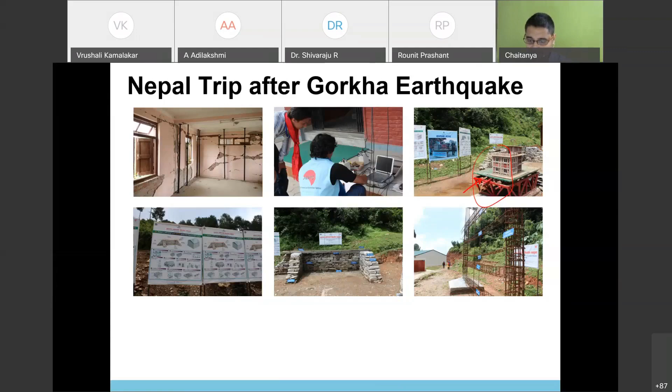From here, what we learned is that in spite of the fact that all these training centers were located in rural places, they were able to create a huge amount of impact. What I personally learned is that even if we learn hard, if we cannot keep it simple and educate, the implementation process is very largely affected.

With this understanding, my approach to doing research had slightly changed, because the purpose and objective should be to solve the problem, and for that we need to understand the problem thoroughly. In this case, the Nepal NGOs and the government understood that their problem is economy.

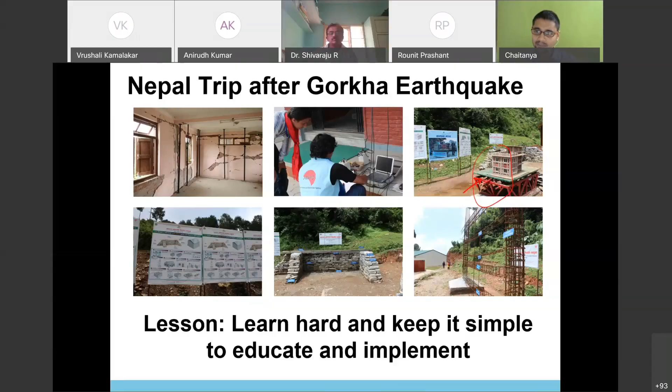They cannot afford a huge amount of money to create awareness in rural areas, so they made the equipment small, but the science and engineering behind it remained the same—they right-sized the understanding of science and engineering to fit their budget, and could use this program to create awareness even in small areas. This was something that I understood a lot, and it's the motivation behind the research work I'm going to talk about from now on.

To give you a brief preface of today's presentation, the field of interest here is structural dynamics and earthquake engineering, and we will also talk about some social aspects involved in retrofitting. Retrofitting is strengthening an existing building against earthquakes. This research work is theoretical, field survey, and also numerical.

This whole work was developed in the context of Nepal, which means Nepal acts as a laboratory for this research. However, it is also applicable for seismic zones of India, where this soft story problem prevails. I'll talk about the soft story problem in the next slides.

I basically assume that the audience can understand some basic structural engineering terms such as interstory drift, finite element method, static pushover analysis, base shear and roof displacement, dynamic analysis, and engineering optimization. You don't have to know details of these technical terms, but at least a broad understanding of what they are and their implications would be enough for understanding my presentation today.

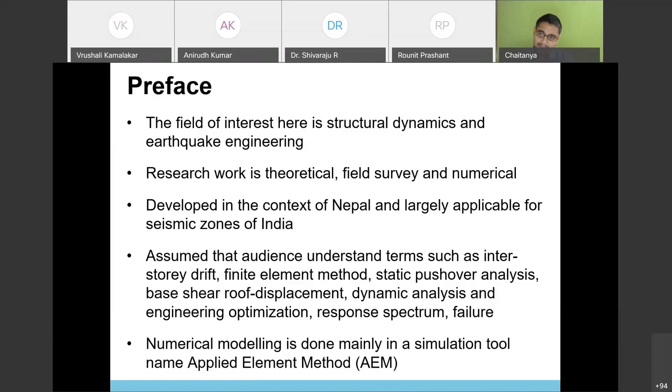As a structural engineer working in earthquake engineering, what we think as soon as we see these buildings is, of course, there are a lot of other problems with these buildings, a lot of other provisions which don't exist, but the soft story problem is a major issue. Many buildings had collapsed due to this soft story problem. It caused severe damage during the Gorkha earthquake, with many buildings going into pancake collapse because of it. This is a very prevalent and well-known problem, yet it has not been solved.

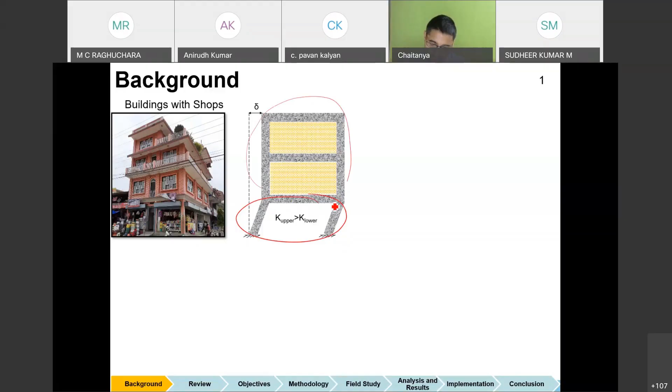What happens in this soft story is the stiffness of the bottom story becomes lower than the stiffness of the top story, causing what's called the P-delta effect. When the building slightly moves, the whole mass on the top floors exhibits moment at the bottom of the building, and this building goes into a mechanism and collapses.

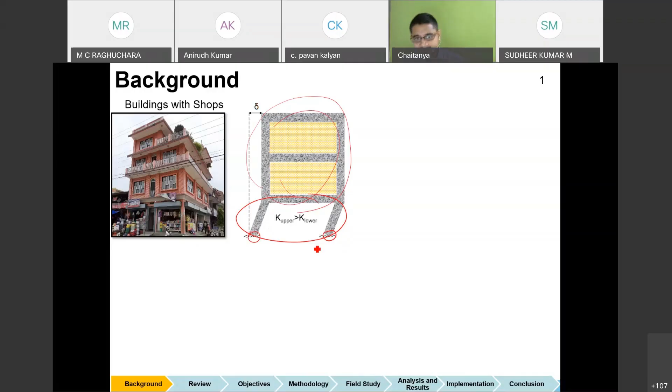That's what we have seen in the 2015 Gorkha earthquake, where many buildings collapsed in the pancake collapse mode. Preventing these buildings from collapsing this way is the primary concern of this research.

But if we look at it as a structural engineer, we see so many buildings with open stories in almost every semi-urban and urban area of Nepal. This is because of the economic condition and the amount of benefits people get from these areas - it's probably their livelihood. The reason why these buildings are constructed this way is because they earn livelihood from these spaces.

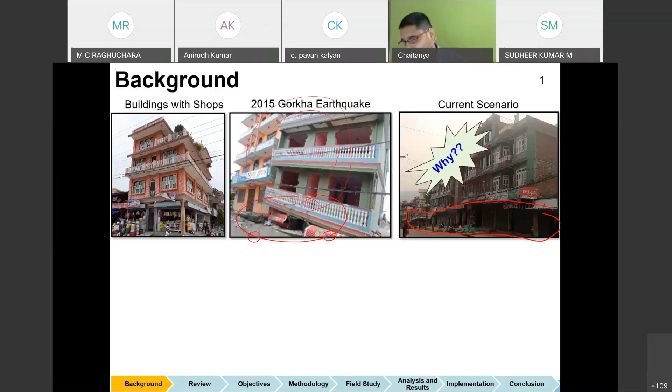So the question still remains why. The reason is the social need - it is their culture and lifestyle to have business and parking on their first floor or ground floor.

Because these buildings are usually constructed in urban and semi-urban areas, the social problem is that there is not enough economic support from the government to go for retrofitting, and the promotion system does not exist. So the social comprises social need, and the technical need is an appropriate methodology which can solve this problem, along with availability of material.

We cannot impose solutions like steel jackets, because while steel jacket is a very good solution which can also retain their open space - since it only jackets the columns - the space required for opening the shop still remains open.

So this is a good solution, but unfortunately, the number of shops or buildings which are open are huge, and we need a huge amount of steel, which is probably not available indigenously in Nepal. It has to be imported from India or China, and the cost of retrofitting will become very high. Considering this is a very large scale retrofitting project, this probably cannot be a good solution.

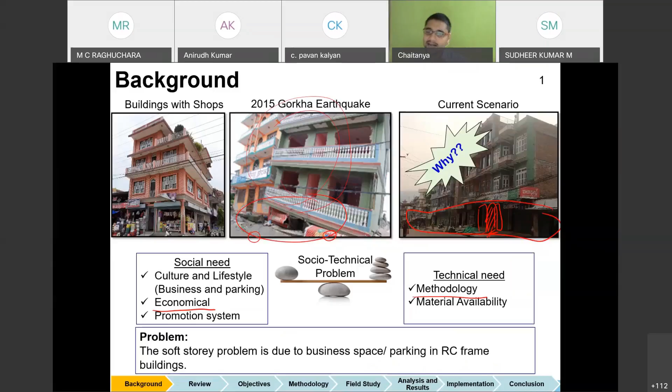So what we understood is that the soft story problem is due to business space or parking area in RC frame buildings. We are narrowing down the problem by saying it is because of business space and parking in RC buildings.

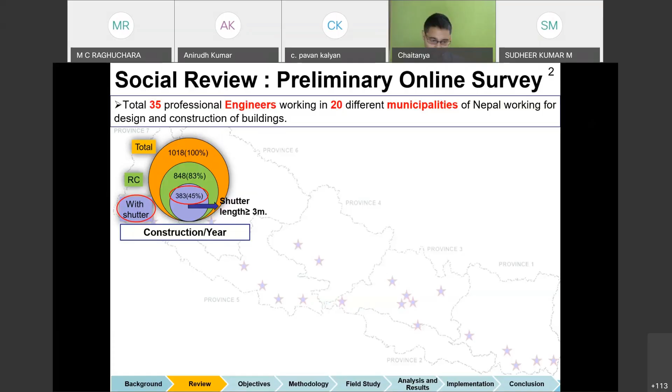From their responses, we understood that more than 45% of the buildings have shutters on their ground floor in a year, and the average number of stories of these buildings is less than 3 for most of them. So these are low-rise buildings.

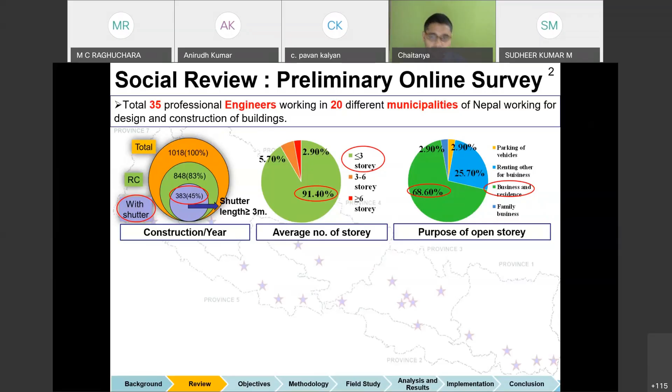The purpose of this open story is either for business or residence also, in certain cases where people have a small parking lot in the front and a very small room in the back. Why they are not going for retrofitting is because they do not want to close their business or parking lot. Of course, this is a natural understanding based on our observation, but we still wanted to validate it using responses of professional engineers.

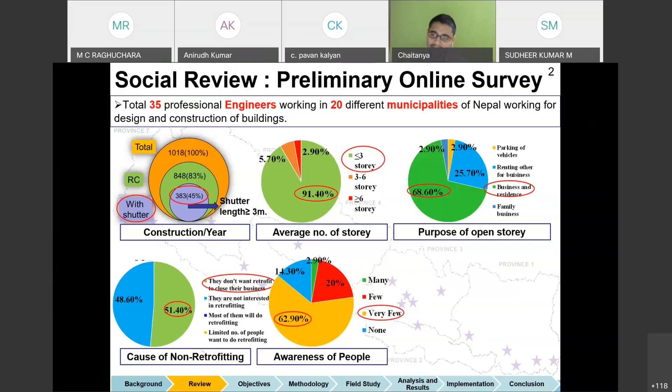So the hypothesis was kind of verified with this point. And the awareness is quite low in Nepal, in spite of the fact that the Gorkha earthquake had already occurred.

And what is the requirement of these people? So now we try to educate them. If we try to educate them on retrofitting of buildings, what would they ask for? Do they ask for life safety, or do they ask for a very, very strong building?

So the answer was they want life safety during a large earthquake. That is, even if the building goes into a collapse mechanism, you have enough time to evacuate the building completely. It wouldn't be a sudden collapse. So that amount of safety, if you can ensure with your retrofitting solution, would be a great solution for their social need, considering their economic status.

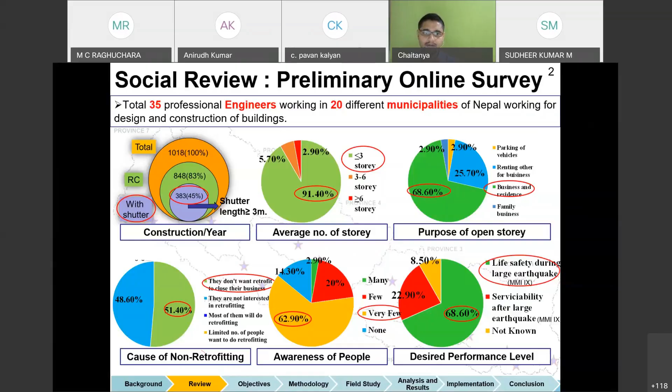So after that, we did a technical survey. And to do the technical survey, we used software called AEM.

So what we did is we took a very typical frame, shown in A, and we applied a force on the top story to replicate a pushover kind of behavior from the building. We pushed this frame and tried to get the force and displacement delta, and we divided the force by seismic mass, and we got something called the base shear coefficient, as shown in this figure.

So we did this exercise with all the frames shown in this figure. These are different kinds of frames or different kinds of solutions that have been implemented in the past.

So the best solution would be using an infill wall itself, which is in B. And then we use solutions such as strengthening all columns and beams, strengthening all columns and beams of the open floor, strengthening columns only, strengthening columns and increasing shear capacity of the beam, increasing capacity equal to the infill, increasing the column capacity to be equal to the infill, and then providing steel bracing, providing shear wall, and steel jacketing.

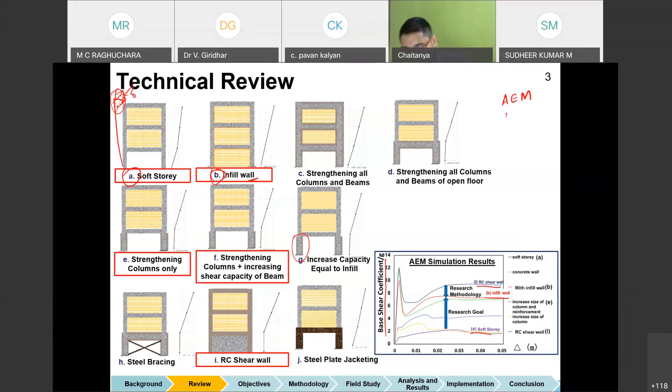So what we decided to do, I'll explain in the next slides, but to briefly tell you: if this is the capacity of your soft story, if you can increase the capacity of the soft story to this point by bringing down the capacity of the shear frame to this point, that would be a very optimum method of finding a retrofitting solution for the soft story problem.

But among these different cases of retrofitting solutions, we drew a few conclusions based on analytical methods as well as numerical modeling in applied element method. We found that these 5 cases were showing low performance.

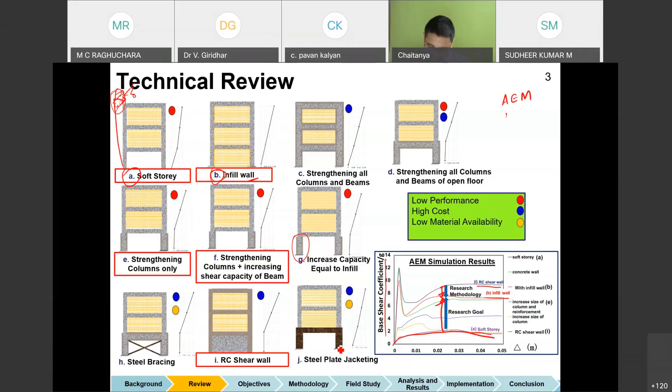Some of them are very high in cost. Some have very low material availability, such as steel jacketing, which as I explained earlier is not available in Nepal, and the cost is also very, very high. And some of them have very low usability.

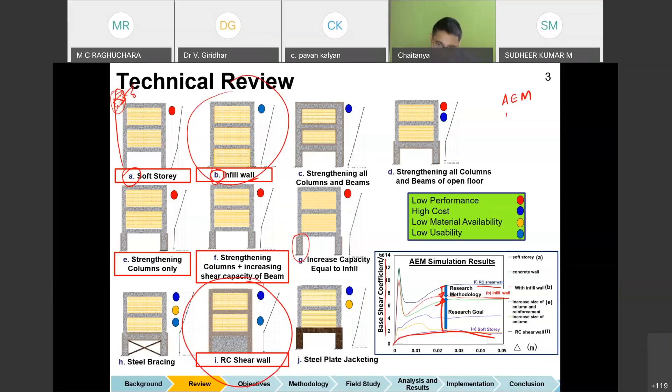For example, this is a very ideal case, and this has very high strength. And both of these cases have no usability. Suppose you suggest one of these two as solutions, the landlord or the person running a business on the ground floor would not be able to run his business. He would have to close down his business. So that is not a solution at all.

So the objective of this research is to provide a practical and feasible solution by ensuring adequate performance, cost, and usability. And we will do this using the applied element method and an optimization algorithm. So if you can optimize your performance while keeping in mind the cost and usability, you will provide a very customized solution for the people of Nepal.

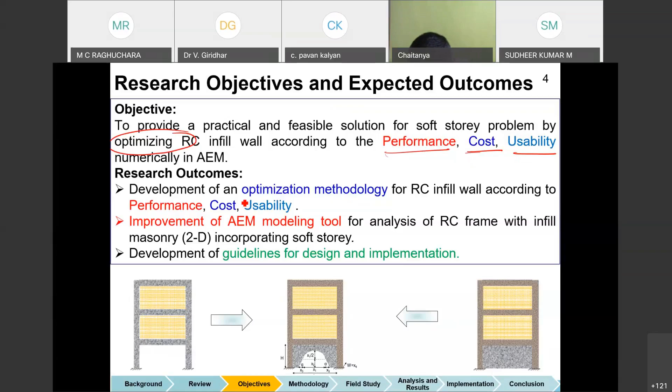So this was the objective, and how to do this is by developing an optimization methodology for reinforced concrete infill by ensuring performance, cost, and usability. And for this, we needed to modify this applied element method tool to incorporate this optimization algorithm. And then finally, in this study, we have also developed guidelines for design and implementation of this method.

And coming to the fundamental question, how do we do this? So this is the frame.

In the previous slide, you would have seen that the frame with shear wall had very high strength, which is not really needed. So we have decided to open up this shear frame gradually to match the performance of a frame with masonry infill.

So this shear frame infill is an infill with concrete. If you reduce it so that the remaining amount of shear wall can replicate a full infill inside this frame, that would be a very good solution.

And for that, we needed to do a mathematical optimization. So you gradually open it and ensure performance, cost, and usability, all three parameters. You will get an optimized frame which will perform like a frame with masonry infill. So this would be a good solution.

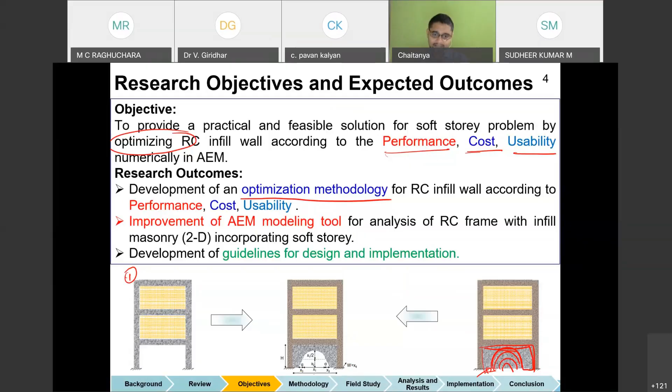How did we go about it is what I will explain in the next methodology part. To do this, first we needed to understand the problem thoroughly, so we had to do technical survey, literature survey, and social survey. We have already done this, and briefly the results were presented to you in the previous slides. Now the current work is to develop an optimization framework.

So what is an optimization framework? It is like minimizing or maximizing an equation, subject to certain constraints. Here what we are doing is minimizing the cost of retrofitting subject to certain restrictions on performance, usability, and complexity in making this retrofit.

Suppose I provide a solution in which you just have to make some spherical cuts inside the infill area. That kind of complex construction might increase the cost and might also make it impossible for local masons to execute this kind of retrofitting solution. So that would be really difficult.

So keeping in mind that the cost should be minimum, yet the performance should be adequate, yet the usability should be adequate, and yet the complexity should be low, we developed an optimization framework. To see whether this framework would work properly, and to get input values for this algorithm, we needed to do some field study. We also needed real building parameters to carry out the numerical modeling of the proposed solution.

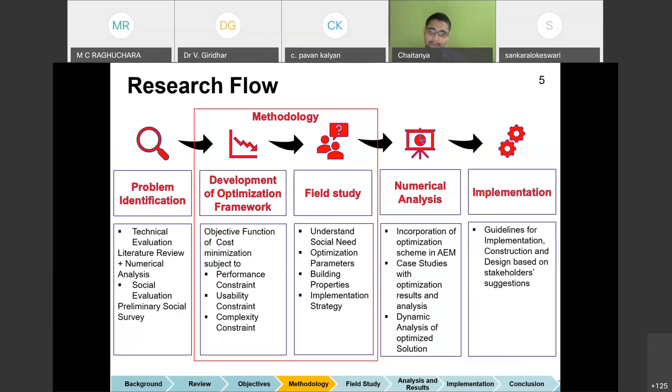Coming to optimization, first we take a bare frame, a frame which has an open story, and we check whether this frame is actually a soft story or not. So we check the initial capacity of the frame. Usually the frames which are not seismically designed are usually soft story.

Then we initialize with various parameters such as opening dimensions, the diameter of rebars to be used in the retrofitting, the spacing of rebars inside this retrofitting part, and the thickness of the wall. Then we gradually go into cycles of iteration. The optimization algorithm used is sequential quadratic programming, a type of numerical optimization method developed back in the 1980s and 90s, and we found this very suitable for our requirement.

We use this algorithm with an objective function which minimizes the cost of retrofitting, or the cost of construction inside the open frames. The cost depends on the concrete cost, reinforcement cost, labor cost, and business disturbance cost as well. Suppose you go for construction, you have to close your business for a few days, and that business disturbance cost is also considered here. So if you keep the complexity low, the construction time will also be lower.

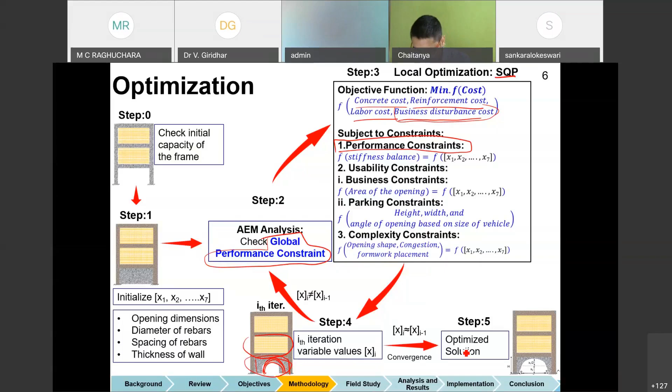So this is the final optimized frame. When you achieve convergence, you get this.

And to give a little bit more information on how these objective function and constraints and the global performance are calculated, it is shown here. So it's a cumulative sum. The objective function is a cumulative sum of material cost, labor cost, and disturbance cost, as mentioned earlier.

And the performance is nothing but the stiffness of adjacent story is set to be lower than the stiffness of soft story. So it becomes a pyramid kind of structure in terms of stiffness. That would be considered as a very stable structure against soft story problem.

Our usability constraints are based on the amount of area that has to be opened. Here the landlord can give his required area, and our algorithm can set that requirement, and we can propose a solution in that context.

And finally, the complexity constraints have considered various variables to account for the complexities in the opening, complexities in formwork, etc. And we set a particular requirement empirically by using expert opinions. We have also done a field study, which will be explained later on, in coming up with different variables which were used in setting these complexity constraints.

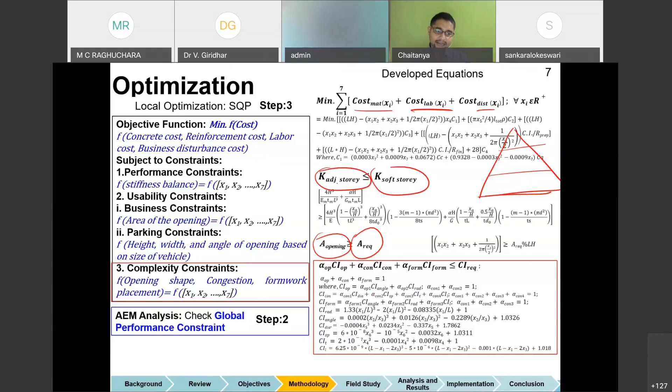And finally, in AEM analysis, we also check the performance. To check this performance, what we did is we developed a new index called the relative softening index, which is nothing but a ratio of the time period of our retrofitted frame to the time period of the infill frame.

And we set that this shall be less than or equal to 1, which is nothing but we are trying to equate the time period of this frame with the time period of this frame. But at what point? So we push both of these structures.

So that the interstory drift that this building has achieved will become equal to 0.75%. For Nepalese buildings, after the Gorkha earthquake, many experts visited, and they said that 1% drift is enough for these buildings.

for collapse, etc. So these were expert opinions. And since we are doing a numerical study, we wanted to have a more conservative method. So we restricted our drift at 0.75% itself.

So let's say when these two buildings are pushed and we take it to a point of 0.75% drift, the time period of these two buildings will also increase gradually as damage occurs, because you're pushing the building, and 0.75% drift is adequate damage, and these time periods will change.

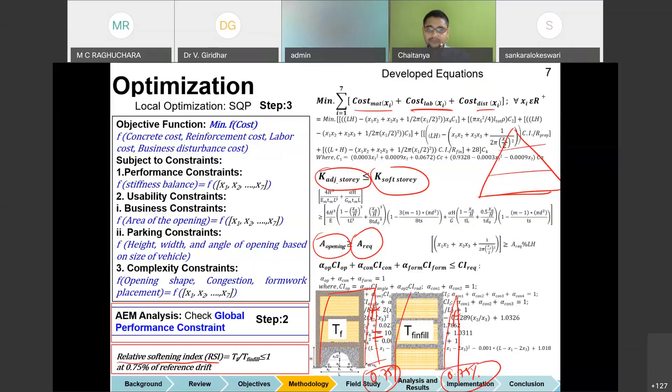This we did. And finally, we had to implement this in the applied element method. As I told you, the applied element method is a different numerical tool which can conduct collapse analysis, and it has proven to be very efficient in capturing the behavior of reinforced concrete and masonry buildings in the past.

And your faculty, Dr. Rajaram, knows it very well. And if somebody who is interested in learning about it can contact him.

So in this, there are different stages, like in finite element method, there are different stages of providing input and then setting up the stiffness matrix, inverting them, and getting displacement solutions and satisfying compatibility equations, etc.

So in this process, we initially set our baseline input frame, and then we set a baseline input for infill RC, and that is inserted inside the applied element method. This applied element method has been developed in Fortran. So we had to develop a few Fortran algorithms to insert this optimization scheme into it.

And as I mentioned earlier, we used SQP, and this whole setup was inserted carefully without disturbing the existing structure of the applied element method. This is a brief understanding of what this applied element method is. It's very similar to finite element method with stiffness matrix, compatibility equation, constitutive equation, and equilibrium condition.

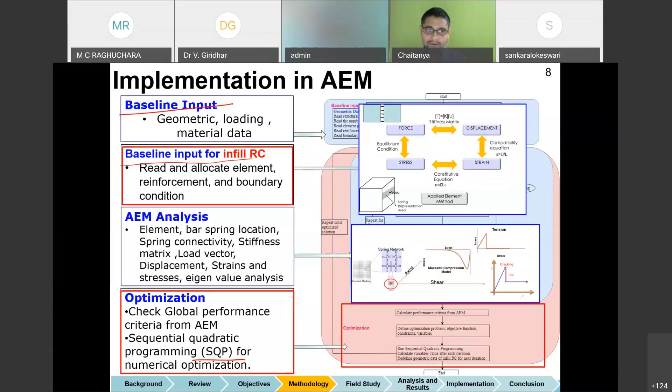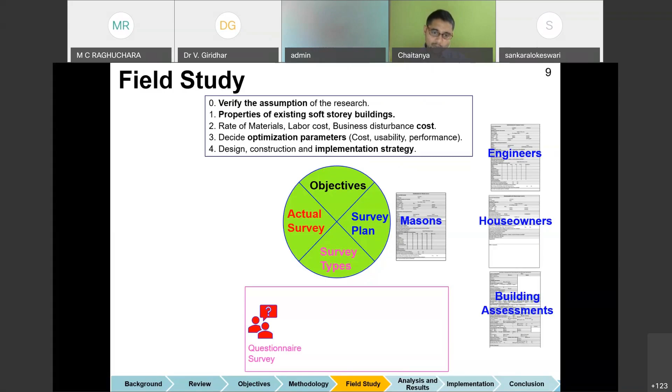The type of survey we followed was questionnaire survey, interaction and discussions, and building assessment and material tests. In the actual survey, we interviewed 57 masons, 20 engineers, and 17 house owners, and we tested about 14 buildings with rebound hammer and ultrasonic pulse wave test to get the current material property of these buildings approximately.

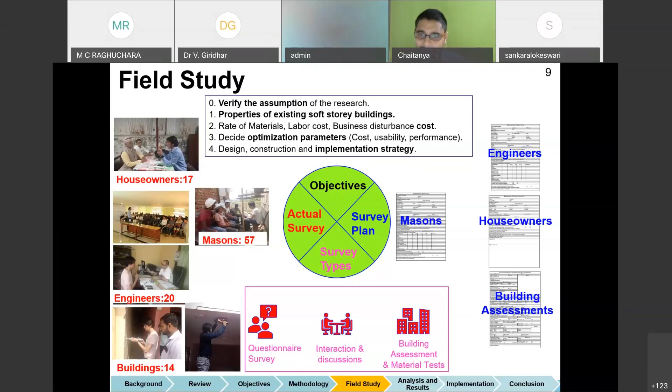The study analysis showed that most of these buildings were used as rented shops, and many people didn't know about the soft story problem. People don't want to close their shop due to retrofitting, and people can spend about 10 to 15% of their total building construction cost on retrofitting.

Let's say if the cost of the building is 20 lakh rupees, people are ready to spend about 2 lakhs for retrofitting. So that was on a very positive note, that people are willing to spend a little bit more money than we thought. This was probably due to the Gorkha earthquake, which happened in 2015, and the amount of awareness programs that were conducted in Nepal in the aftermath of the Gorkha earthquake.

We also examined the different costs of materials used, and those were given as feed-in data for the optimization algorithm.

What we also understood about preferable performance of these buildings is that people want life safety in large earthquakes. As in the first engineer survey also, we got the same kind of response.

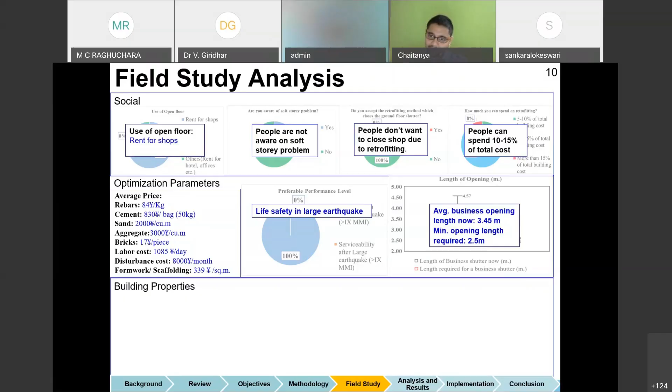The average business opening width of the shop right now is around 3.45 meters, but people are willing to give away about 1 meter, and they want to have a minimum opening length of about 2.5 meters. This was also a very positive response from the landlords, that they are willing to sacrifice about 1 meter for retrofitting their buildings.

And we surveyed different geometrical configurations of what beam sizes are used in Nepal, what kind of rebars are used, and what stirrups are used in Nepal currently.

And we got the mix ratios and the compressive strengths of buildings from the field tests we conducted, and the thickness of the walls that are currently used are about 9 inches approximately. So with these inputs and these different parameters, we started conducting our numerical modeling in AEM, the actual numerical modeling.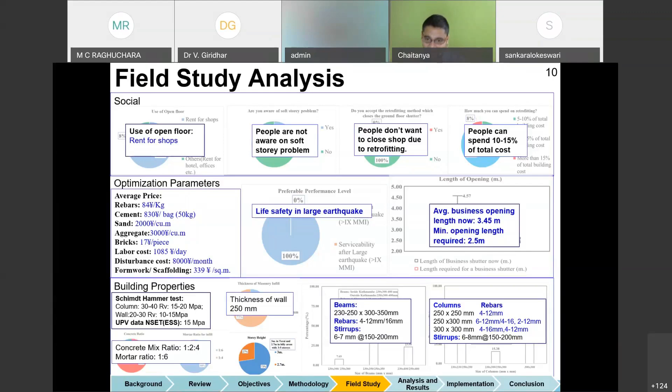The final inferences we got from this field study are that the soft story problem is a socio-technical problem, and the solution should be cheap, but at the same time there should be usability. The performance level required for these buildings is not an extraordinary retrofitting solution which will be fail-proof in all cases of earthquakes, but they want life safety in large earthquakes. The opening size currently is 3.45 meters, but they only want 2.5 meters, and they are happy with 2.5 meters of opening space.

And the building properties are usually uniform in different places based on our amateur survey, because what we understood is that the mason class are very well connected and they construct buildings very similarly. Engineering construction is not a common practice in the suburban areas of Nepal.

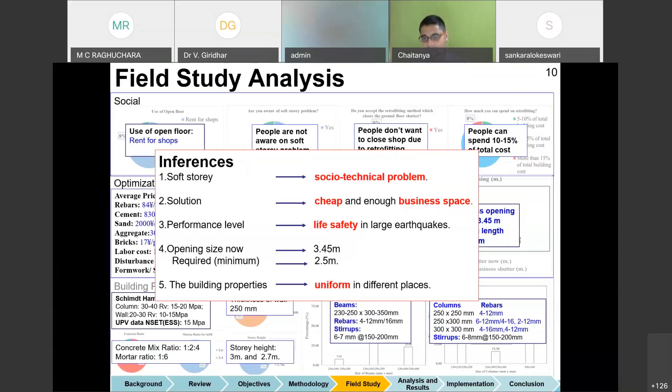Coming to the analysis, we took 3 different cases with different kinds of material properties and dimensions, shown in the other tables. Case 1 is a typical soft story frame with 1 bay. Case 2 is a typical soft story frame with 2 bays. And case 3 is not a typical frame, but we have seen these kind of buildings which had collapsed.

In the Nepal Gorkha earthquake, there was a hotel in, I think, the Dolakha region of Nepal where the ground floor was not soft story, but the first floor had a conference room with glass windows. That is actually a soft story, where the stiffness of this floor is lower than the stiffness of the floor below. After the earthquake, this whole floor had collapsed in a pancake collapse form.

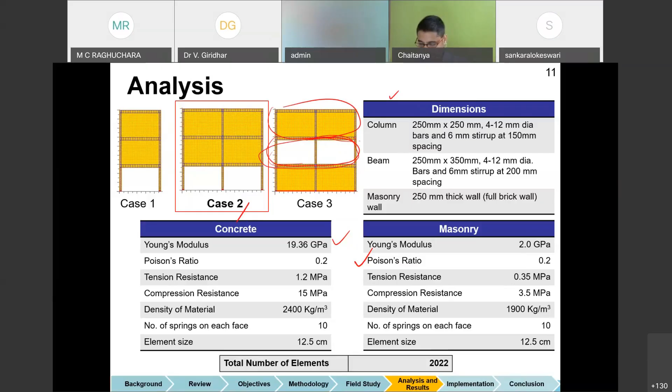We consider all these 3 cases, but today I'll be showing the results of case 2 only, which is quite a typical frame. We use the following properties; the details of the properties can be learned later.

What we did was the iteration: we took this open frame first, and then in the first iteration we filled the frame with a shear wall. Gradually we started opening the wall, and whenever we open it, we push the frame. We keep on pushing it, doing a pushover analysis.

We try to balance this floor's stiffness with the floor above, changing different properties in the iteration. We change the dimensions of rebars, spacing of rebars, and everything, so that the stiffness of the bottom floor will match the stiffness of the higher floor.

We keep on doing this until the point where TF becomes equal to TF infill, as I mentioned earlier. At this point, we stop the simulation. We consider that as the convergence point.

You can see that the final frame, which was obtained here, and the frame in iteration 1, has this final crack pattern shown in the figure. Here you can see that this shear frame has not cracked as much as the cracks in the top floors, because in the top floors you have masonry wall, while in the bottom floor you have concrete wall.

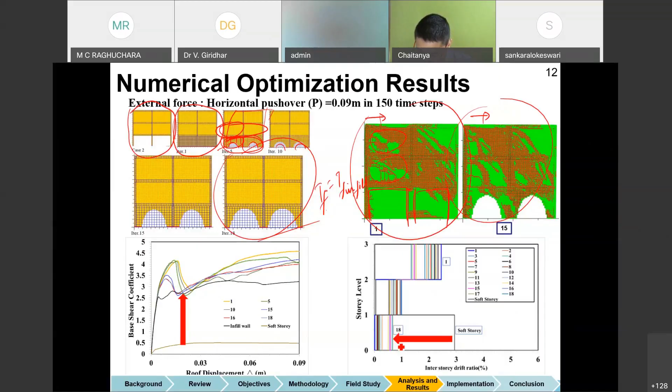This achievement can be seen in more structural quantities too, where the base shear strength of the soft story frame has been raised upward, and the interstory drift has been reduced—down to around 0.75%, which is considered the adequate requirement for Nepalese buildings, as we discussed earlier.

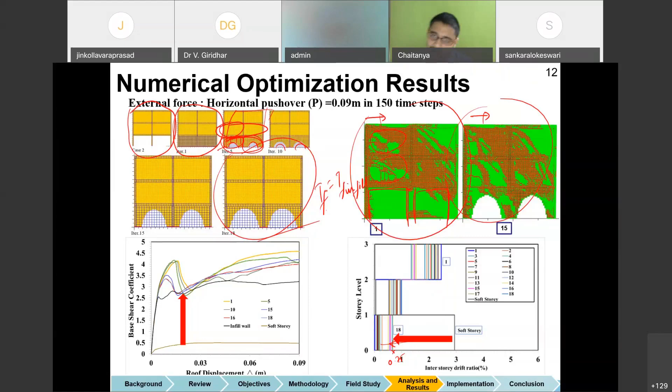Further details about these results can be discussed later on, but before that, I would like to show how this iterative algorithm worked. As the number of iterations increases, the story stiffness keeps on reducing, because you open the frame, so the stiffness actually reduces, but the area of opening will increase.

When you compare the cost of the building, it actually reduces, because this concrete shear wall is more expensive than the frame with opened concrete shear wall.

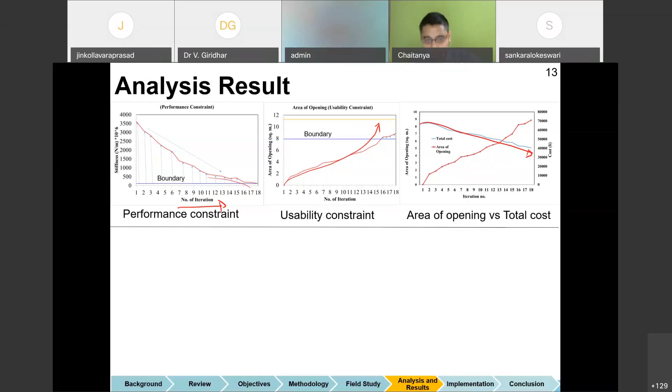Comparing the interstory drift, we restrict the drift at 0.75%, and you can see that the soft story frame's interstory drift has been reduced here.

Ultimately, what we could say is a zone somewhere in this area can be considered optimum, depending on how much the landlord is willing to pay. If the landlord is willing to pay a little bit more money, he can go for this option with a particular amount of opening; if his requirement is for a larger opening, he can go for another one. So this is a very customized solution, as you can see in these figures.

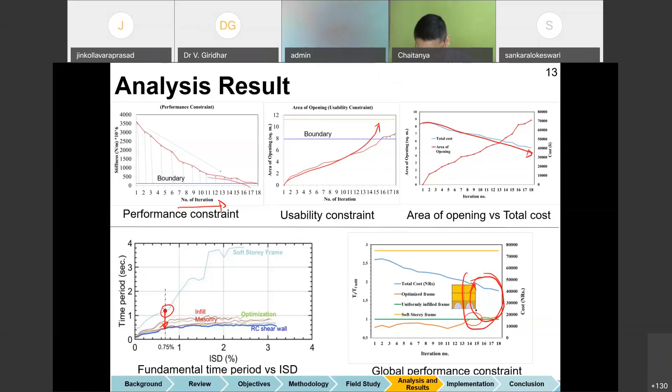Finally, we also have to check the dynamic performance of these frames, for which incremental dynamic analysis was adopted. Incremental dynamic analysis means you take the frame and gradually increase the earthquake. Suppose you have a small earthquake, you scale it to make it bigger, and keep increasing the size until the building goes into collapse, to see what the capacity is. So how to see this capacity, at what earthquake level the building collapses, is a fundamental way of looking at the dynamic performance of the building.

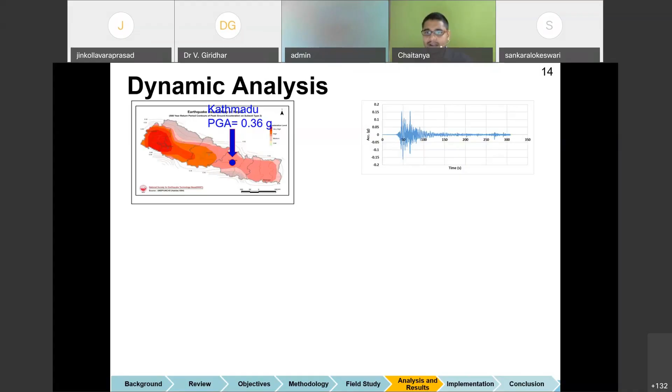For this, we took Kathmandu as the selected region, and according to their codal provision, 0.36 G is the designated hazard level. But the Gorkha earthquake had already shown about 0.2 G.

We decided to use the Gorkha earthquake accelerogram for incremental dynamic analysis. But the earthquake record was too long, and since we had to run a large number of simulations, we decided to reduce the size of the ground motion. For that, we took the significant duration, which is the duration in which the maximum amount of earthquake energy is released. As you can see in the figure, it's somewhere between 50 and 100.

So this duration was considered, and we scaled this earthquake ground motion to different intensities. Intensity is a ground shaking measure, and we used JMA as the intensity scale. There are other intensity scales such as MMI or MSK, but we used JMA because we're working in Japan. We took 4 JMA intensity up to 6 upper JMA intensity for scaling and for obtaining ground motions.

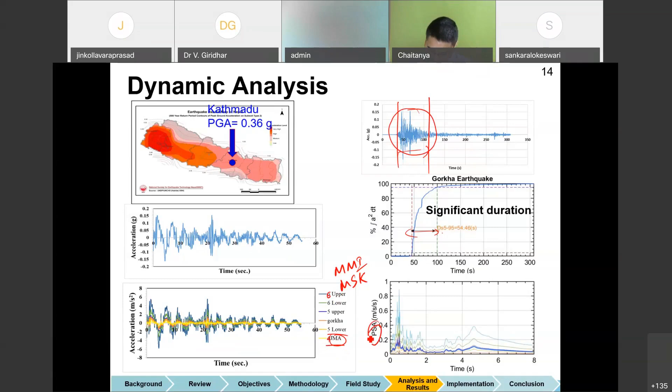We scaled the pseudospectral acceleration to obtain different ground motions as shown here, and applied it to 3 different cases of the frame we studied: the frame without any infill, the frame with normal masonry infill, and the frame obtained from our optimization algorithm and AEM, which we call the resultant frame. In all 3 cases, we gradually increased the size of the earthquake.

We can see that at intensity 4 itself, the soft story frame had collapsed. The fully infilled frame sustained even 6 minus earthquake, but went into collapse mechanism at 6 plus. Our resultant frame sustained 4, 5 minus, and 5 plus with certain damage, but showed large deformations. At 6 minus it also showed large deformations, and went into collapse at 6 plus. Of course the shaking was quite high here, but as I mentioned earlier, life safety was the fundamental requirement of Nepalese people.

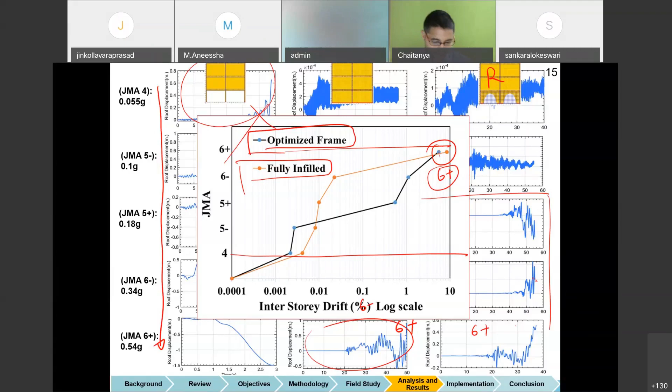Ultimately, this kind of solution has to go into a code book. Since this research was presented in Japan, we had to convince the committee and the evaluating organizations that this could be translated into a code book as an annexure. We did not make a new code book, but the existing one could have an annexure with 8 different clauses to incorporate this kind of retrofitting solution.

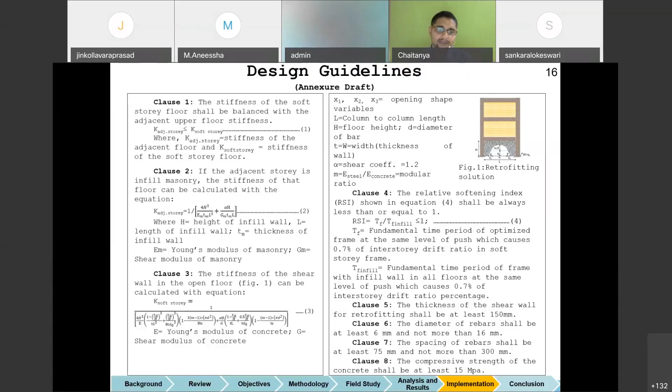This was mainly for demonstration purposes, with all the equations we mentioned earlier. How to construct this practically is the next thing I'll explain.

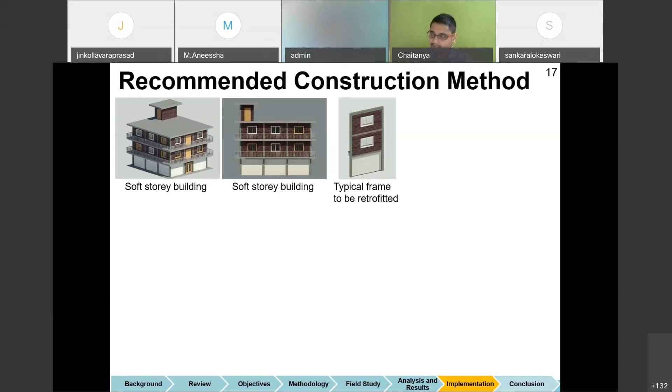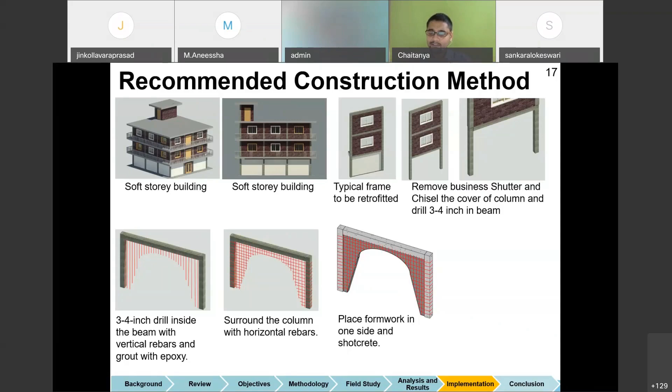We take a very typical soft story building and a typical frame that has to be retrofitted. We get the optimized solution, remove the shutter, chisel the walls, and drill 3 to 4 inches into the beams and columns, inserting vertical and horizontal bars, grouting with epoxy resins if required. Then we surround the columns with horizontal rebars, place the formwork, and use shotcrete to fill the concrete, and finally we get this frame.

To make this even cheaper, one person cannot go for retrofitting in a day. So we may have to use certain equipment like drillers and shotcreting machines, and we might need ready mix concrete, etc.

Earlier I showed you a photograph of a typical semi-urban street in Nepal. If all these buildings decide to go for retrofitting on the same day, and if they prepare everything in advance, they can consult a local engineer to get the resultant frame and corresponding retrofitting scheme, procure adequate formwork, and then place the formwork and keep it ready.

Few ready mix concrete trucks can run into the street at the same time and fill in at the same time and leave. In this way, the cost can be reduced.

To ensure this kind of retrofitting, we also need to propose how this work can be institutionalized and who will be the stakeholder for this. For that, we first need to understand the social problem thoroughly, which we have tried to do in this research work. We then had to do comprehensive research and come up with a solution. This research has been done up to this point, but we have to extend it to address various other problems involved.

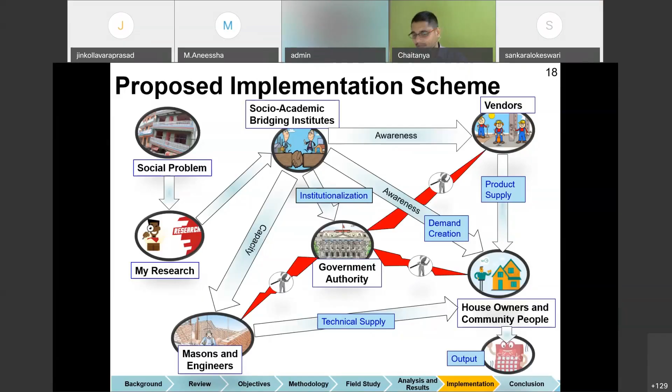without the soft story problem. The implementation strategy should be from bottom to top, not top to bottom. We have to create an awareness program and increase the demand, and for this different kinds of stakeholders are responsible, such as political leaders, house owners, community people, material suppliers, vendors, schools, universities, and recently apps and social media.

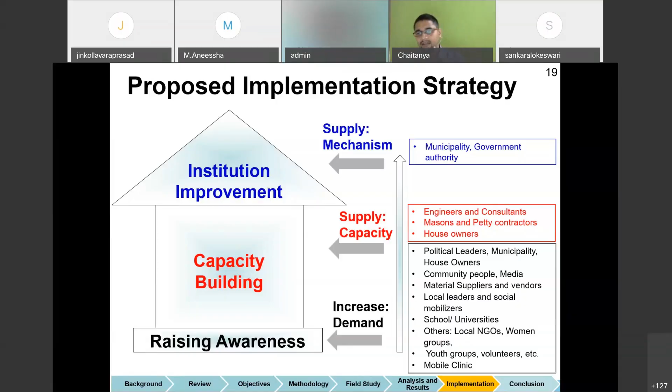The supply capacity has to be handled by engineers, masons, house owners, contractors, and consultants. Finally, the supply mechanism has to be dealt with by the municipality or government authority to institutionalize the whole system.

Finally, I would like to conclude by saying that the failure to solve the soft story problem in Nepal is mainly due to high cost and due to lack of usability in the solutions that have been proposed so far.

In this research, we have provided a numerical solution, a numerical optimization scheme. We've developed field survey forms to study the problem comprehensively. We conducted enough field studies in Nepal to understand the socio-technical aspects of the soft story problem. And we implemented sequential quadratic program algorithms in the applied element method.

We did a capacity assessment to understand the capacity of our resultant frame compared with the ideal case. And we also propose guidelines for implementation, construction, and design.

The advantage of this method is that it has stakeholder involvement, so the stakeholder can propose what would be the width of his shop after retrofitting and how much cost he could afford. The solution we have provided is locally available because we are proposing a solution with regular construction materials, which would be available in Nepal, even if imported.

This solution is a standalone retrofitting solution, so it does not affect other retrofitting solutions. Therefore, you can use this retrofitting solution and still re-strengthen your building for other deficiencies related to seismicity or any other disasters.

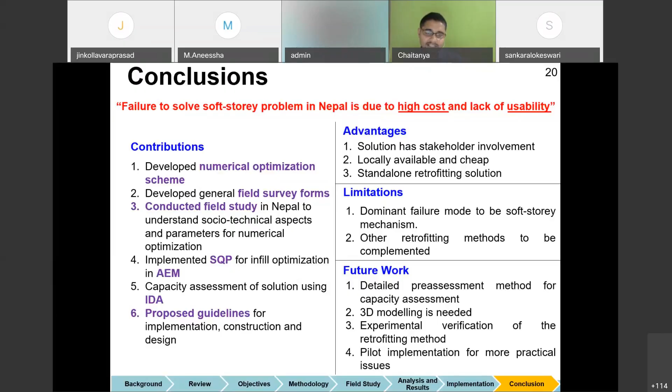In future, we would be working on a more comprehensive pre-assessment method for capacity assessment, and we will also do some 3D modeling of this method and experimental verification. We will do a pilot implementation of this project in the field, probably in India sometime soon.

I would like to say that my student has received an award from the department for his research work. This was considered to be the best research in 2019.